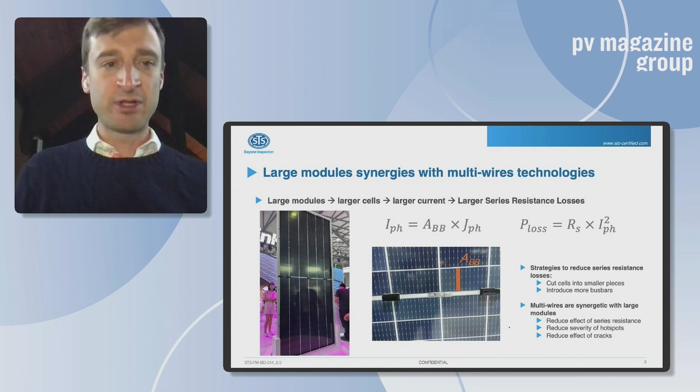However, we also see challenges resulting from this trend, and I want to highlight three of them very briefly. The first one is increased risk of performance issues. The second one is risk of soldering issues, and the last one is risk of cracks or micro cracks. So regarding performance issues, I want to point out that reducing the series resistance is extremely efficient for increasing the performance at high irradiance.

So you see, if you plot, and that's just a design plot, the efficiency as a function of irradiance, you see that with a high series resistance module, you will get maybe something somewhere here. And if you lower the series resistance, the effect will be mostly visible, again, power loss equals R times I squared. So if you're reducing the series resistance, it will have a higher effect with a high photocurrent, and therefore with a high irradiance. If you don't change anything else, the series resistance effect will be mostly at 1 sun.

Now what happens, so that's in absolute value. But the problem is that the rating, typically low irradiance performance, is given in relative performance. So what you do, you just scale down this orange curve. You make it fit to the performance at high irradiance, and then what you see is that by just scaling this down, you end up having relatively a lower efficiency at low irradiance for the actually low series resistance module.

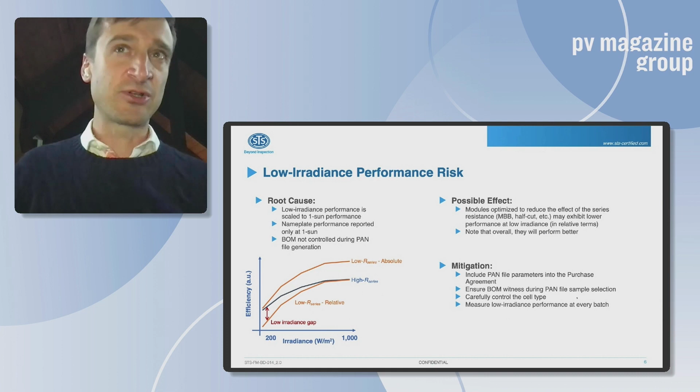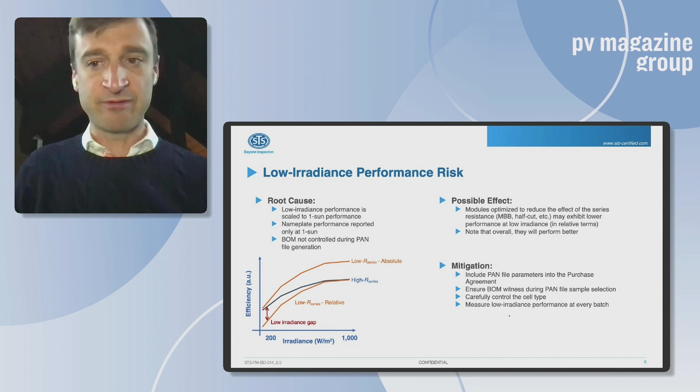And then mitigation. We do recommend including the PAN file parameters into the purchase agreement. We do recommend witnessing the BOM during the sample selection for the PAN file, and we do recommend measuring the low irradiance performance for every lot or every batch. So that's one risk that we see.

Another risk that we see is desoldering. This sometimes more complex interconnection scheme may lead to some soldering issues. What are the root causes of that? Maybe the FMEA was not perfectly done during the development. You also usually have, with these small wires, a smaller contact or soldering area. The stringing process may not be fully under control, or we've seen also insufficient control on the line. EL calibration, visual inspection, operator training is a big one. And overall, it may just be a more difficult technology to make work.

And that's just illustrating that. If you look at the rework rate for one particular module manufacturer, and different months of production of 5 bus bars, so ribbons, and 9 bus bar wires, you see that the rework rate is actually about 30% higher for the 9 bus bar wire. So possible effect, you may lose power, you may have hotspots. How do you mitigate for that? We recommend very careful electroluminescence control. We do recommend 24/7 inspection.

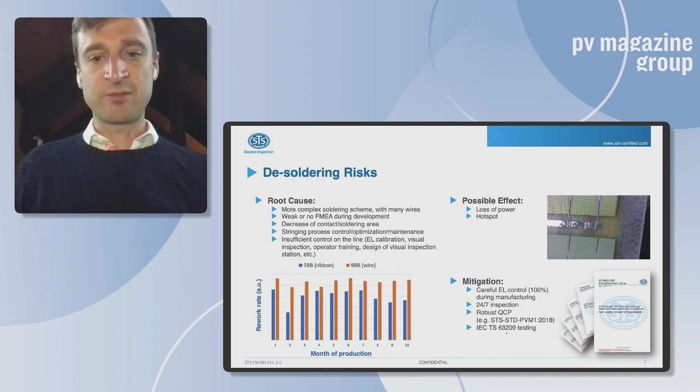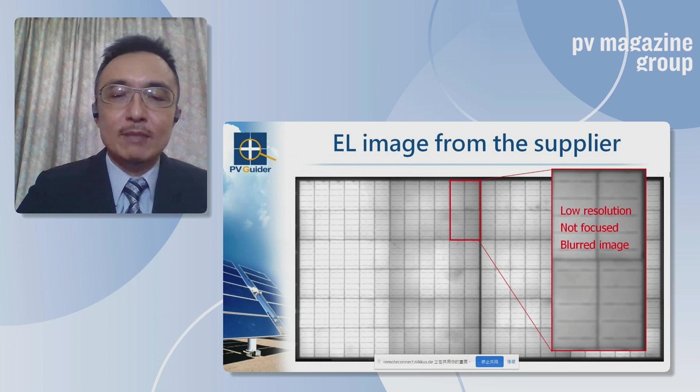In the image, you will see the resolution is very low and the camera is not well tuned in the right focus. The image is blurred, so you cannot see all the details. So we asked the supplier to improve the image quality, but they said it's the best they can do because it's the limit of the equipment. But actually, we know the equipment very well, so we helped them adjust the machine.

So I would say the first lesson is that EL image quality is very important. It will help you to see all the details. The next question is: what about these small cracks? Do they really cause serious issues because they are so tiny? In the next slide, I show you an example from another factory, also in pre-shipment inspection. We found a serious crack in the cells, and of course the module was rejected.

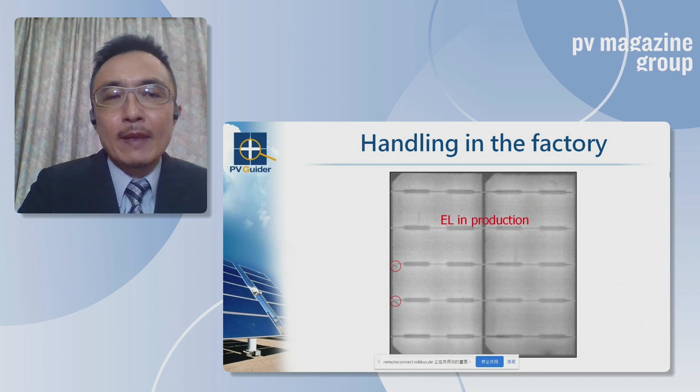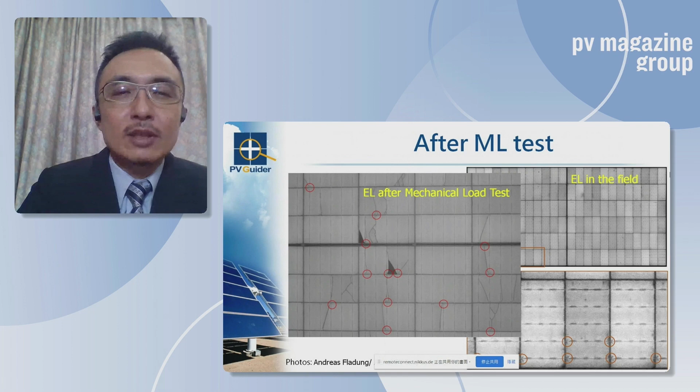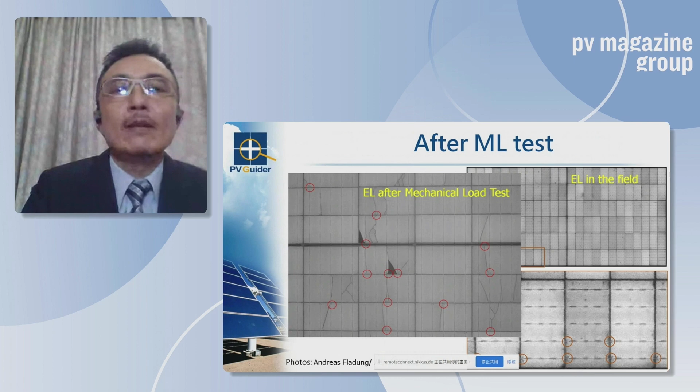What about the cracks in the field? In the field, we also do some EL inspections, and very often we also see this kind of small crack. If you put these cracks under mechanical load, you will see them propagate a lot, and some even form a serious inactive area. I have to say, the impact depends on the design of the cells. For example, for multi-busbar cells, the impact is much smaller, but for 5 busbar, 4 busbar, or fewer busbars, this can be a very serious problem.

So as a summary, first, new technologies always come with new problems. So it's very important to have stress tests to check if there is any unexpected defect. The second point is that the EL image is very important. As I have shown, with poor EL image quality, you can almost see nothing.

And last but not least, defective modules are sometimes delivered unintentionally because the module manufacturers don't see the defect because of the equipment limit, or they see it but don't know it is a problem. For that, I would suggest having third-party quality control that will help you notice all these issues. Also, sampling EL on site would be very helpful to control the quality of your plant. So that's all of my presentation, and I'll give it back to Jonathan.

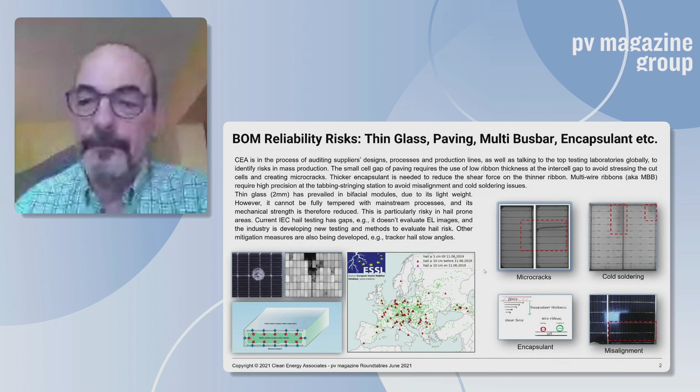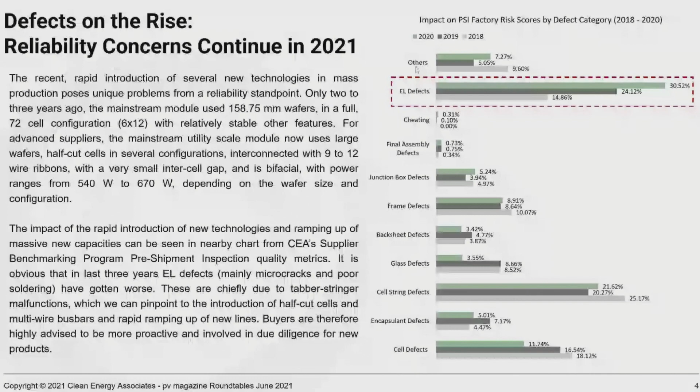But this is what can be seen on the factory floor from 2018 to 2020. Overall, there is stability. There are some improvements. The cell quality that's fed in is better. These are visible cell defects, not EL defects. But the EL defects themselves have risen. And this is mainly due to soldering, cold soldering or weak soldering.

Introduction of multi-busbars plays a big role, half cut also, and cracks. And this is very important. So what you see here is not really actually defect rate, it's a risk score. So the defect rate themselves has not increased so much, but the risk of the defects has increased. So more severe cracks. Of course, before a few years, we had one standard wafer size, full cells, 72 cells, big gaps between the cells, and this has changed dramatically. And that's exactly what you see here.

Now, what do we do? We do everything we saw before, okay? As Jay said, for responsibility, you need to do from the factory gate down to pre-installation and post-installation so that you can have the chain of custody of the quality and accountability. It's very important. But this is like a very schematic, high-level map of CEA's approach that, as I said, includes everything that was recommended before, but at a more high level. So the first step is to check the product.

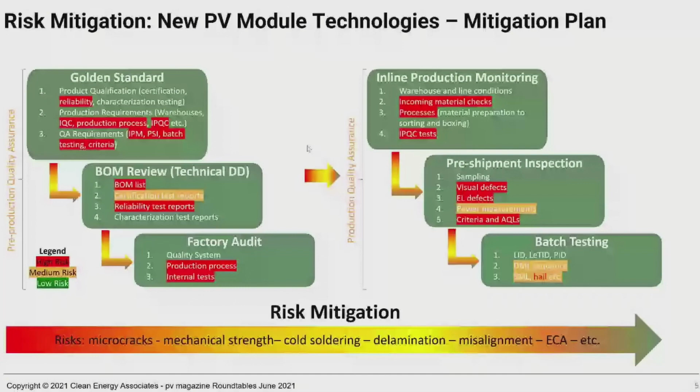We have a set of technical requirements, which is called the golden standard. It checks the product qualification, but also the production and QA requirements. The areas that are marked in red are especially pertinent for the new generation module. So reliability testing, and thank God we have the new IEC standard, the 63209-1, that is codifying all these Thresher and PQP, etc. standards. So this is a good tool. Of course, IQC, IPQC, all the QA requirements are very critical.

And then the BOM review, which is basically a review of the documentation, reliability test reports. We receive and review several sets of reliability test reports on a daily basis. When I say reliability testing, I mean testing that lasts for several months. And of course, a factory audit is very important because we have brand new facilities and brand new processes. And it's very important to do that before going to production.

And then inline production monitoring is basically a mini factory audit on a daily or even nightly basis, where we're checking the material, for example, EVA, okay, it's the same type. Is it the same thickness? Because thickness is very important. And pre-shipment inspection, as we discussed, that's where you can really block bad shipments and reject them and have them reworked. Batch testing is always important.

For hail, we see more pronounced interest because the glass can have variability, the glass tempering process. So there is some concern here. Also DML sequence or SML, not so frequently. Definitely LID, LETID, PID, they are there. But these are like cell level, not module level technology. So that's a high-level methodology of de-risking the project, especially in this era of new PV module technologies.

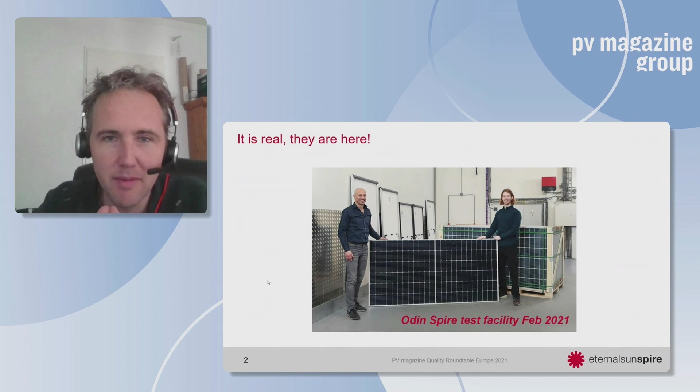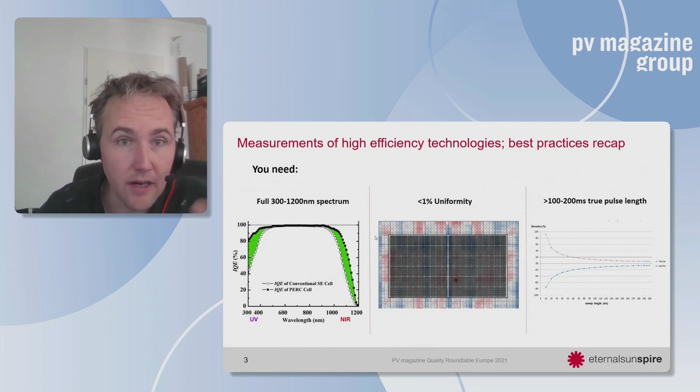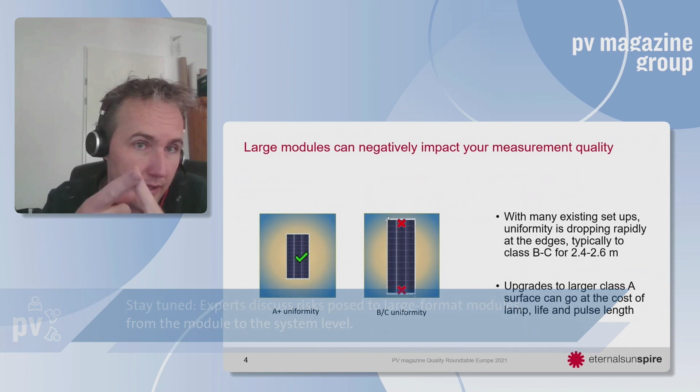You can, of course, put more energy in the same light bulb to get a bigger plane, but then you have the big risk that you reduce the pulse width, first of all, because you need more energy, and the lamp life, because you're burning your lamp stronger, basically. So that is the challenge.

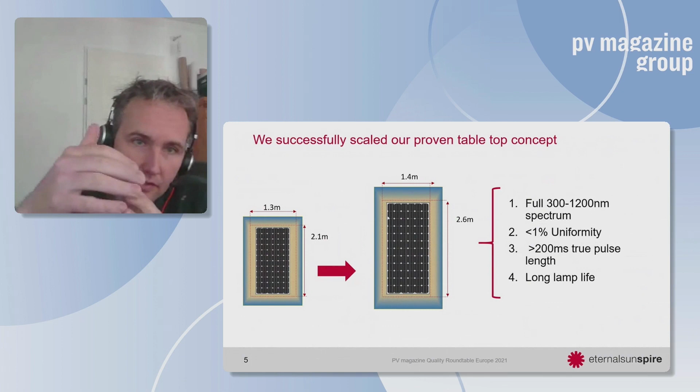And what we did on our tabletop flashers, we scaled the lamp and the optical components in the length of the machine to keep the same performance in a larger size. So the same full spectrum, the same good uniformity, the same long pulse, but with the same lamp life as well. And this is it. It's here. It's running already in many factories and laboratories around the world.

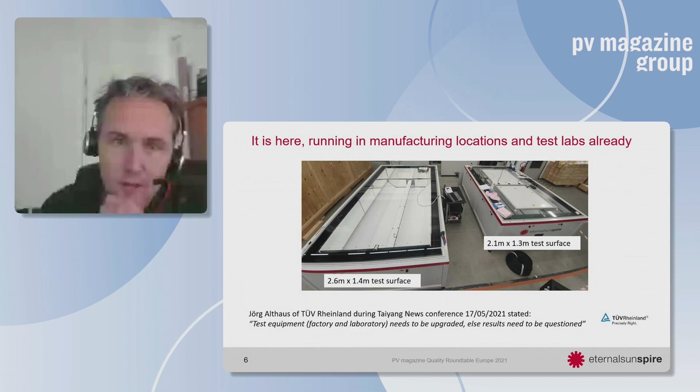Thank you very much for that, Stefan. That was it. Perfect indeed, and thanks for quoting me as well. Always nice to be quoted at a presentation.

And just quickly from my side, are you able to quantify how much inaccuracy could be introduced if there is this loss of uniformity in the measurement? Yeah, very good question. Well, if your large module reaches the edges of that test surface and intensity drops, for example, 10%, then typically, depending a bit on the strings and the bypass diodes, you often get a step in your IV curve, and you can have losses in your fill factor of around 2 to 5%, that order of magnitude easily, depending a bit on the exact patterns.

But several percents of losses easily, and if you go too far out, of course, that can drop really fast. So that's my main message: be careful with your flashers around the edges of the large modules when testing them. Okay, well, important for buyers to know what they're buying.

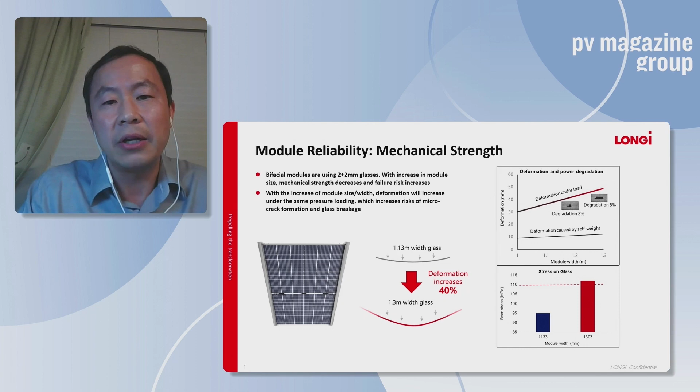We think large format modules have helped in the last couple of years, right? The module size change from M2 to M6 to M10 has enabled continuous BOS cost savings for our customers. But going forward, the economic benefit, like BOS savings, from further increasing module power by using larger module size is going to be limited. But at the same time, the reliability risk will be much higher, right? So utilizing larger wafer and module to increase the module power, we want to settle around 182 millimeter and 72 cells. Okay, thank you, Hongbin.

So there are also measures that can be taken in production to reduce some of these risks. Can you take me through the approach to reduce the risk of cell cracking, for example, which is something we've heard a lot about? Yeah, first, I think we want to make sure the size won't get any larger, right? So we think 182 millimeter 72 cell is probably as large as you want to go. And any larger than that will make the reliability risk much higher, right?

And in terms of reliability risk, there are a couple of main concerns. The first one is mainly on the mechanical strength, right? You think about it, the bifacial modules nowadays, most people are using 2 plus 2 millimeter glass, right? With the same glass strength, then increase the module size, it's going to increase its vulnerability, right?

And under the same pressure, the deformation with a 1.3 meter span is about 40% larger than the 1.13 meter span modules, and the larger deformation will increase the micro crack formation risk, and also the glass breakage on the backside, right? That's going to be much worse.

And the other thing, people probably realize, on the tracker you only use 4 bolts, right, to connect the module to the rail. And the larger size module experiences larger shear force at each contact point under the same pressure, right? Which increases the frame tearing risk due to fatigue. So these are the mechanical strength concerns.

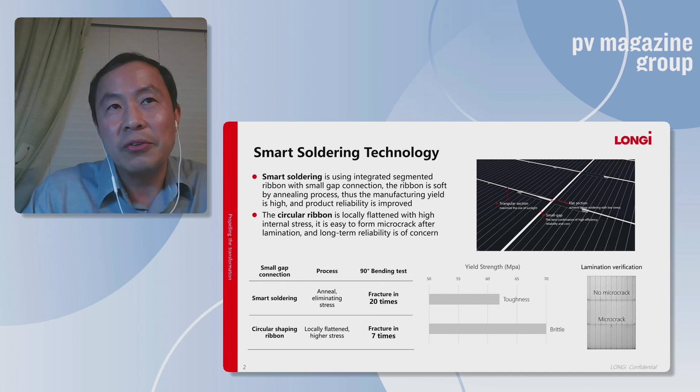Which normally use a round ribbon and do the in situ deformation during the soldering process, which leaves a lot of residual stress on the ribbon, which after the lamination is going to introduce more micro cracks on the cells. Okay. Yeah, so these are the approaches we're taking.

Hongbin Fang, thank you very much for taking us through some of those. A pretty clear message coming from Longi about module sizes, and particularly about mechanical stress, also about the smart soldering. We heard about that textured ribbon being applied by some manufacturers. But turning to the mechanical stress, Simon Meijer, you're the CEO from Coolback Technologies. You've developed your solution primarily to reduce the operating temperature of the module. But there are additional advantages when it comes to these mechanical stress issues, as Hongbin has brought up. Can you take me through those?

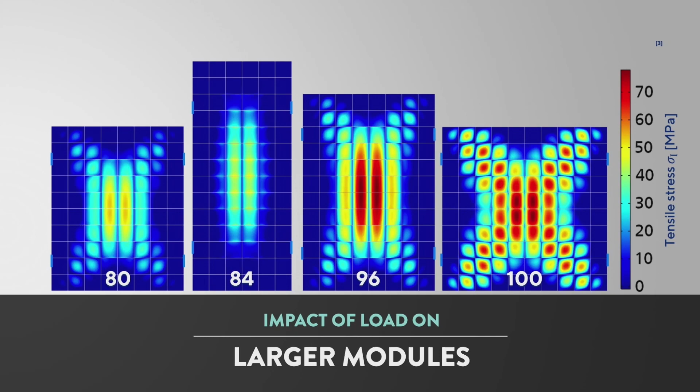Thanks, Jonathan. Yes, of course, I can give you some explanation on how that works. Cooling was our first target for the solar module, and for that we increased the back surface of the solar module. And now with these larger cells and larger modules, you see that the impact of load and bending is really relevant. As Hongbin said, module reliability is what counts, and the larger module actually is not that good on that point. But when we increased the backside surface, we also increased the total strength of the module, and also found a different solution for mounting the solar module.

As Hongbin also said, you often have 4 points to attach the module to the rails. But if you have the full surface of the module available for connection, you can spread the stresses, you can spread the load, and in all static and dynamic mechanical load tests, you can see that spreading the pressures and the loads gives a huge effect on the modules.

Okay, and Simon, you've got a video. You've put together a video to show how the Coolback system really does deliver that additional rigidity and strength. Exactly, and also to refer back to Jay Lin and George Touloupas' input, thinner glass is what we tested, and you can see it in this video at the end. And this is, of course, now just a 72 cell or 144 half-cut cell, but it's still a very nice comparison to see what the Coolback structure can deliver.

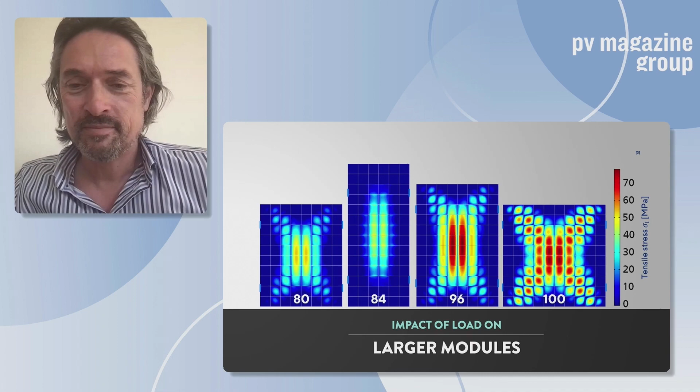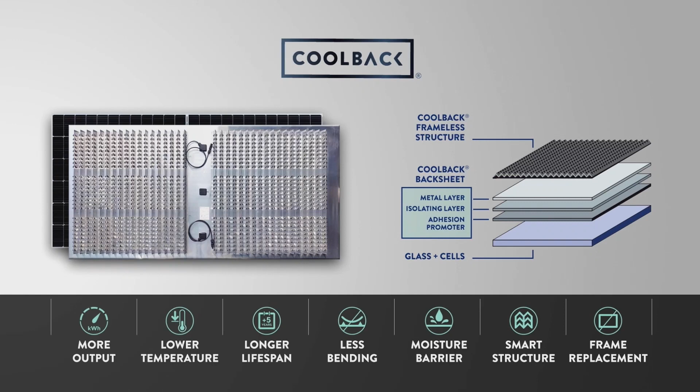Yeah, very visible indeed. Thank you for that, Simon. But I don't think anyone advises jumping on modules at this stage. No, that's definitely not what I want to say. But it's the most visible way to show, with thin glass and with a nice EL, how module technology should make next steps and how it should look. Okay, excellent, Simon Meijer. Thank you very much for that.

Josep Tienda, I want to bring you into the conversation now. You're the VP Sales EMEA for Shoals, joining us from Spain. Now, we're very focused on the module here, but higher power means higher current, higher voltages. On the EBOS, the electrical balance of system basis, what kind of challenges do you see at Shoals? From a manufacturing standpoint, we don't see any additional challenges because all our systems have been designed and tested with even higher currents or higher powers than we're seeing. We do see some issues when we talk about installations in the field.

Traditional methods of installation are going to have an impact on the overall performance of the plant, because with the higher current and power these modules are going to have, if you don't have installers doing the right job at the plant, you have an impact. Okay, and while we are going through a few slides from our panelists, I'll give you an opportunity to take us through the Shoals solution. I think you've got some images that demonstrate the approach to EBOS that you're bringing into the market more actively in Europe.

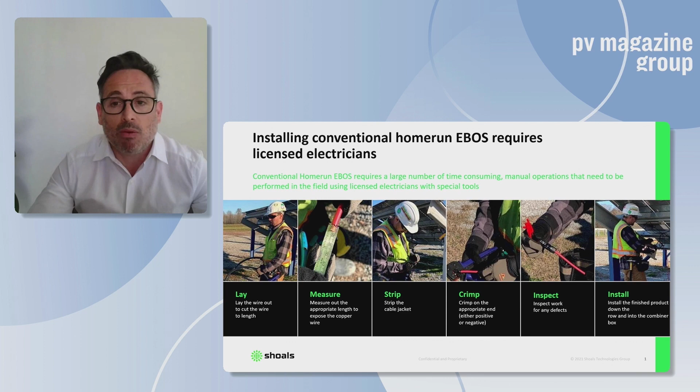So our solution, which is the next slide, shows that Shoals has a system that allows you to have customized EBOS built for your plant. We basically design a harness. The first part is the interconnect harness that you see in the middle. That's going to put all the strings that you can in parallel and bring that to a trunk DC system called BLA, which allows you to get rid of the traditional combiner boxes that you would normally have. All of this comes in a plug and play manner.

The only thing you need to worry about is connecting those string harnesses at the end of each string. Those are protected, so that's why you don't need conventional combiner boxes. We have inline fuses in there, and that allows you to have at the end just a disconnect box that is really simple and lets you connect to the inverter easily without any issues. This is an on-air system. You don't need any work done with trenches or anything.

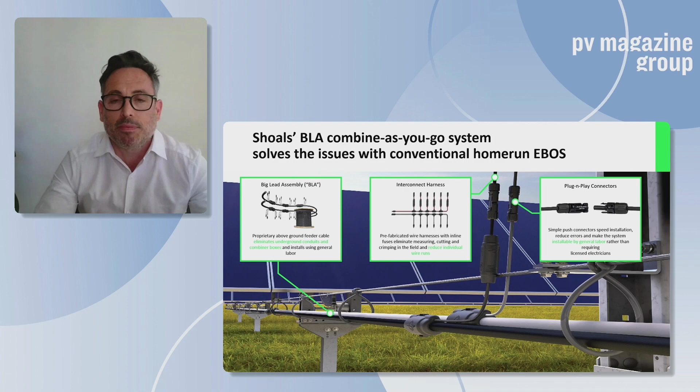It speeds the installation time: you only need 40% of the labor you would normally need, and you can accelerate the installation by 5 times. That has an impact on LCOE as well, because in the end, you guarantee that the energy yield and the plant perform as the components were supposed to. Okay, Josep Tienda from Shoals, thank you very much for taking us through that.

Cormac Gilligan, you've been waiting very patiently. I'd like to bring you into the conversation. As we heard earlier from Eternal Sunspire, these large format modules are arriving in Europe now.

How would you describe the kind of readiness for the industry? We've been very focused on the module, but of course there are impacts right across the supply chain, right across all the different market segments when it comes to an array. How ready are we? Yeah, I think we've seen this trend towards larger power modules accelerating over last year and certainly into this year.

When we look at the different parts of a solar system, everyone has been accelerating their development. So we've seen this across the solar tracker. Single axis trackers are increasingly being adopted, and I think the panelists have mentioned everything to do with how you mount these larger modules. This may mean that they have to tweak if they move from maybe 2 portrait to 1 portrait, to using maybe dual row trackers. So lots of innovation going on there.

When we look at the inverter world, certainly things like being capable of having larger fuses or higher rated fuses to work with a lot of these higher power modules. And across the industry, one of the trends coming out of this panel is trying to move towards more standardization, simplification, so that we move to fewer units in the field, larger modules, larger inverters, even string or central, moving to maybe 200 kilowatt and above or 6 megawatt and above.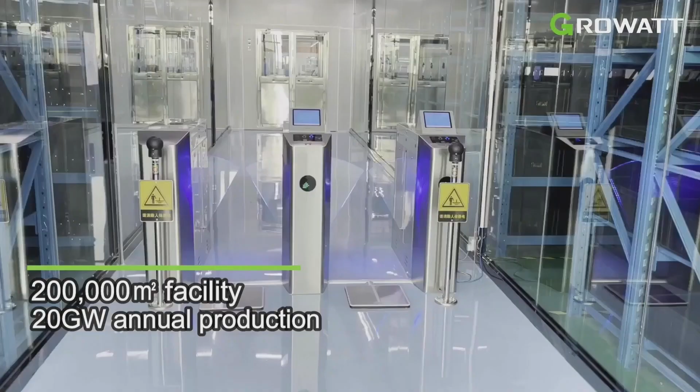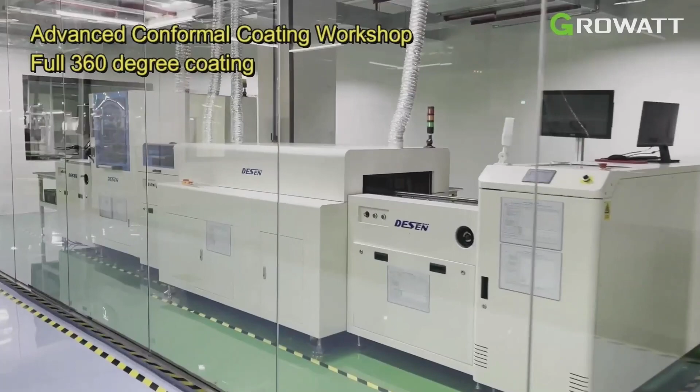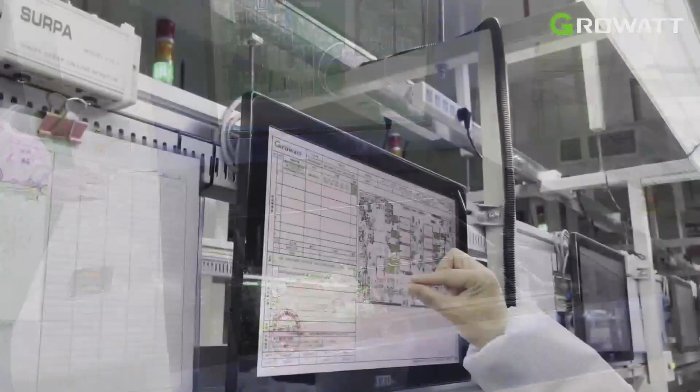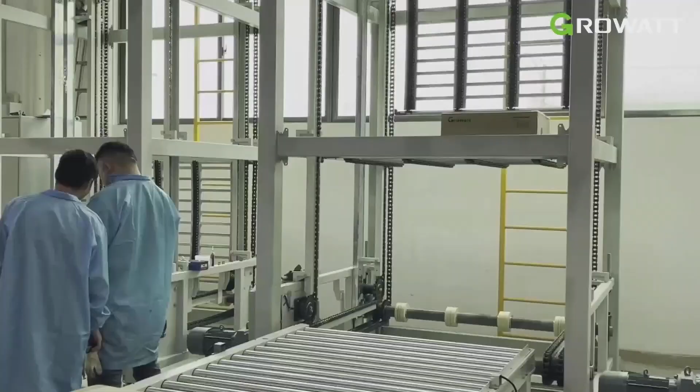As you can see in the video, we use the latest technologies and robots in our production line and warehouse. This guarantees the quality consistency on every single product. Please start the video. Thank you. All right, hopefully that gives you an insight on our new manufacturer, and I hope you like the music.

With over 2.6 million inverters installed globally in the past decade, Growatt has proven itself being capable of keeping up with the highest standards in the industry. Our newest X generation inverters are perfectly compatible with 500 watts and up high power modules, together with integrated AFCI, anti-PID, SPD functions, and the 5-step quality system, we can guarantee a safe and high quality product.

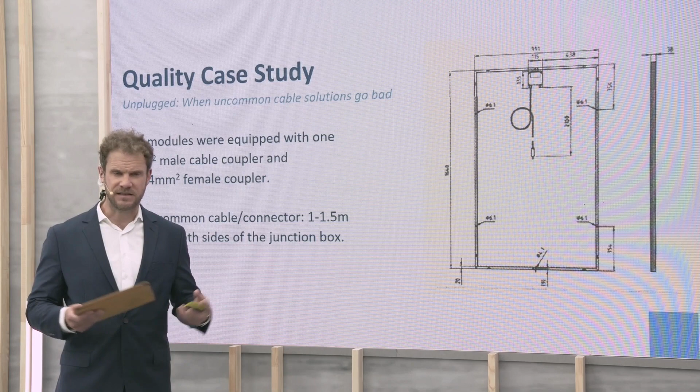The modules were equipped with one 4 mm² male cable coupler and one female coupler. You can see on the diagram here the system that's actually from the module data sheet. And this is really the point of some controversy. The diagram shows that we have one cable and then just the socket, the female coupler, on the other side of the junction box.

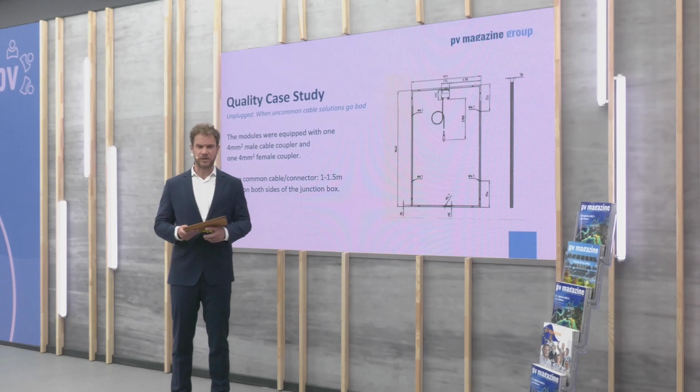The reason for the controversy is that Bieber reports that the park began encountering problems with the connectors. He said that he found unmated connectors and that they were becoming loose over time through thermodynamic effects, so cold in winter, hot in summer. As a result, the connectors have degraded, there are contacting problems, and there's even the risk of fire.

Bieber responds that sometimes the mounting clips can clip flush into place simultaneously. So then just 1 click is heard. But other times it requires a bit of turning or wiggling to get them into place, hence 2 clicks.

The cable supplier's instructions really state that only 1 click is needed, and then both mounting clips are to be in place. It's conceivable then that only one of them is in place when the single click is heard. This is a lot of information about clicks, but it's important as those failure points have shown.